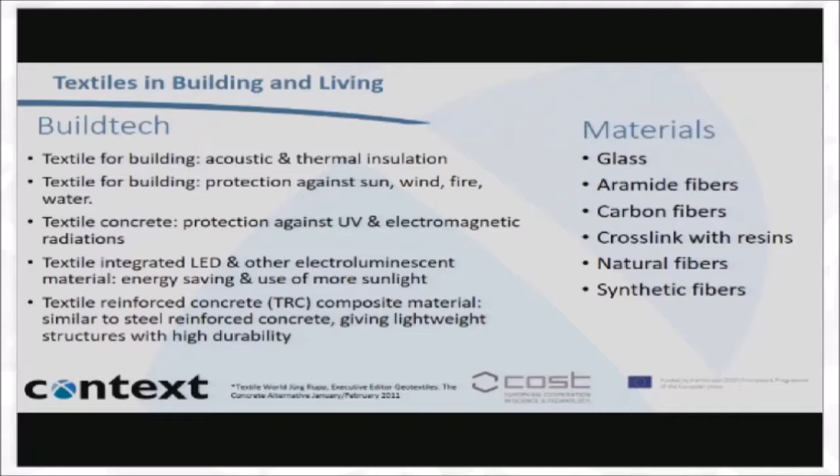Protection against atmospheric agents like sun, wind, fire, water, against UV rays, electromagnetic radiation. They are combined with electroluminescent and LED material for energy saving and energy production. And we also use textiles to reinforce concrete. So we have many applications in terms of composites. We have many different kinds of materials, of course. These are technical fibers: high tenacity fibers, glass, aramid fibers, carbon, cross-linked with resins, but also natural fibers.

As has been said before, they start to have a very important role in the improvement of buildings, and also synthetic fibers. Because if we think about the trends for the future, we can repeat what has been said before by my colleagues. Sustainability, for instance, is one of the key trends. This is why natural fibers and the recovery of waste are important in the building sector. Many applications nowadays are realized through the recovery of waste from the textile sector, because textile processes for apparel produce a big amount of waste.

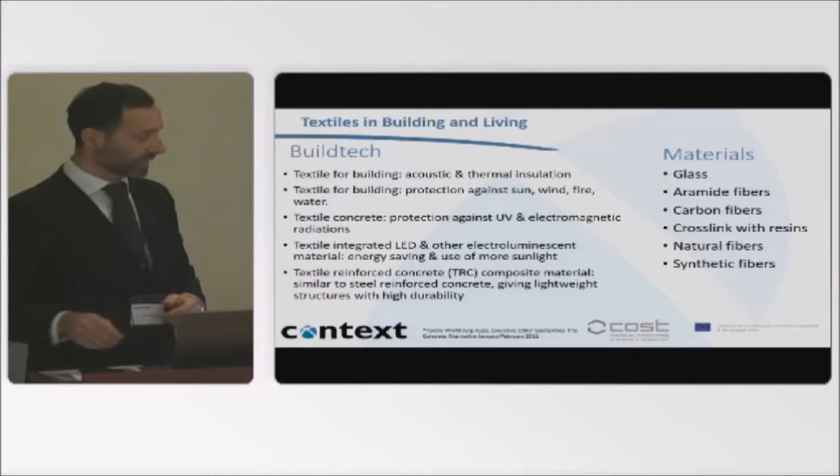We have seen carbon that is producing a big amount of waste during the processing. All this waste can be recovered and not disposed into the environment, and utilized for realizing composites or other materials that are used in the environment. And I think this afternoon you will have the chance to see some very interesting examples of how the recovery of this waste can be used in building and also in other sectors.

The state of the art. Now I'm going to go through very quickly what are the materials and the technologies that are applied today, to see how textiles can help to overcome some of the difficulties that normally used technologies and materials face in the building sector. So we have semi-rigid fiber-based insulators like rock wool.

Rock wool is a material that is very much used in buildings, and it's very good to some extent, of course, because of its tenacity and insulation power, but it also presents some issues like the health protection of people, because rock wool can produce microfibers, as you know, that can affect the respiratory apparatus of people living in this environment. Then we have polyurethane and expanded polystyrene.

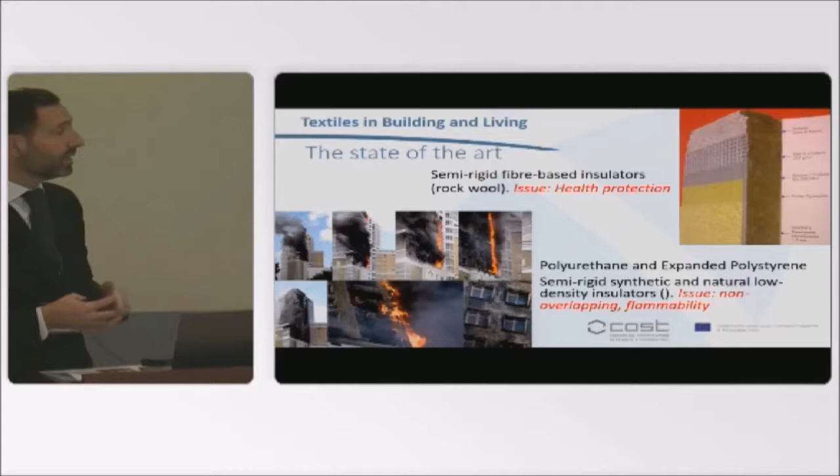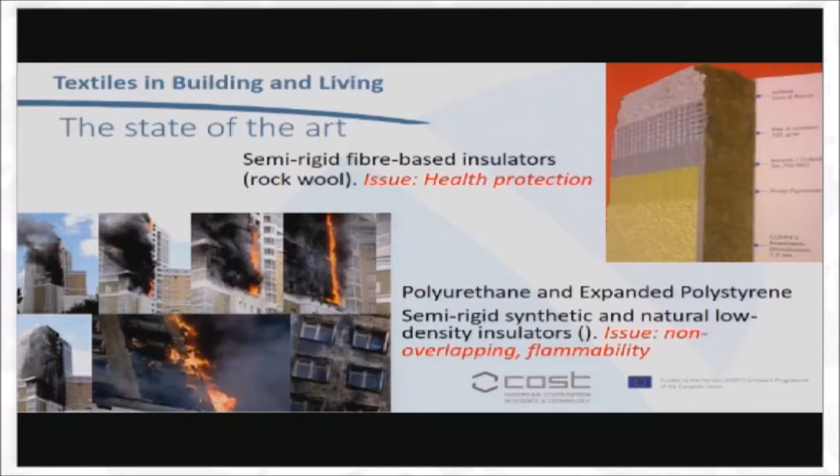Also, these semi-rigid synthetic and natural low-density insulators have a problem because they have high flammability. Besides being difficult to overlap with other materials, in case of fire, here you can see an example of different phases of a fire occurring in a building where the facades were covered with this material, in particular expanded polystyrene. They produce like a multiplier effect, and so the propagation of the fire is very fast, faster than what it should be.

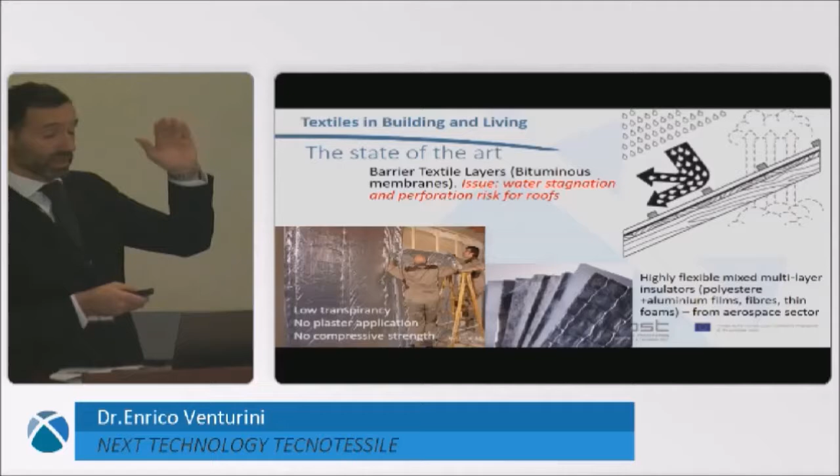Bituminous membranes, so we have here some layers of textile materials, and this application is very used in the case of roofs, but there is a risk of water stagnation, and this can cause microperforation of roof components.

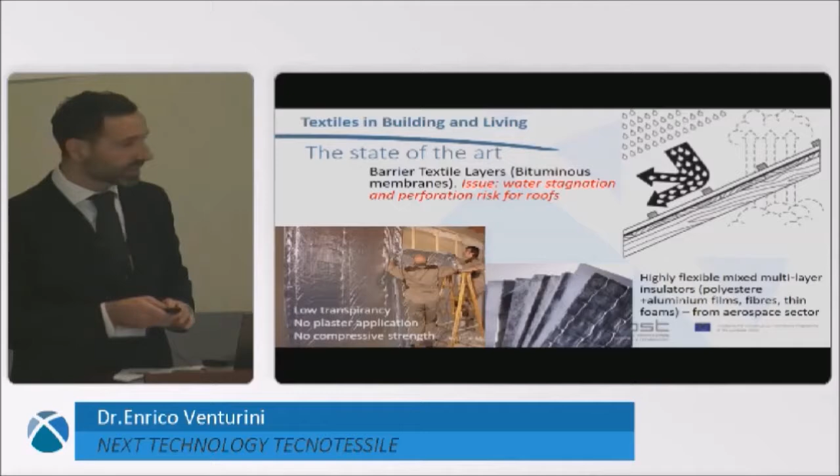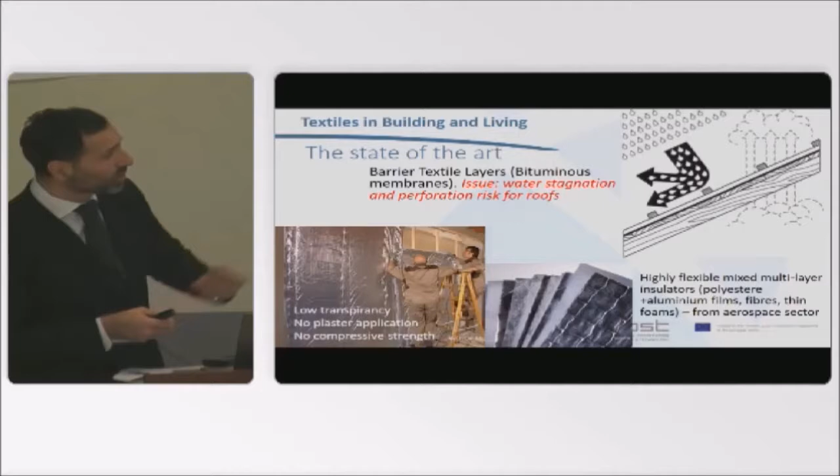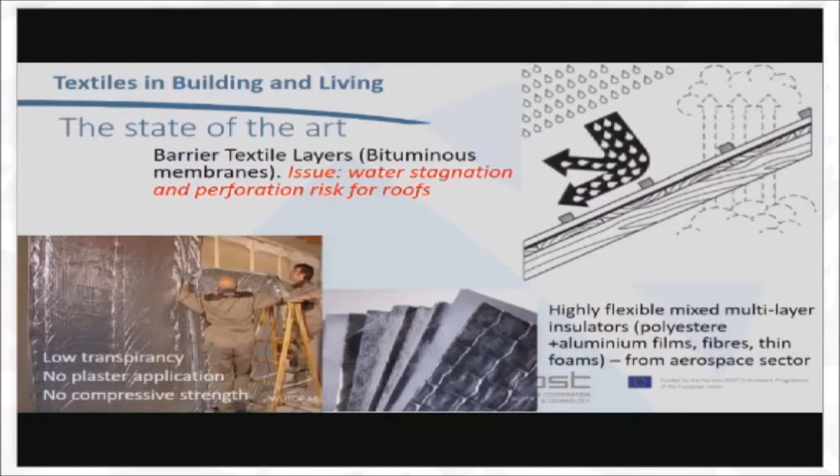The last example I'm going to show you is this multi-layer material which has been transferred from the aerospace sector, because it is used in the construction of some components of aircraft or also for space shuttles. And this is a multi-layer composed of films, fibers, and thin foams, including polyester and aluminum, as you can see here. So it is very light, it is very resistant, it has high tenacity, but it's not transpirant. It cannot be combined with plaster, and it has no compressive strength. So these are some of the issues that can be tackled through the application of textiles, okay?

Why new materials? Because new materials can provide, first of all, functionalities that traditional materials are not able to provide, so that customer needs can be met, and we can provide extreme customization and also novel applications. New properties are possible because the manipulation can go down to the atomic scale for diversified functions. So standard properties of our technical textiles are tenacity, durability, thermal and acoustic insulation, and of course also aesthetics in some cases, like in interiors.

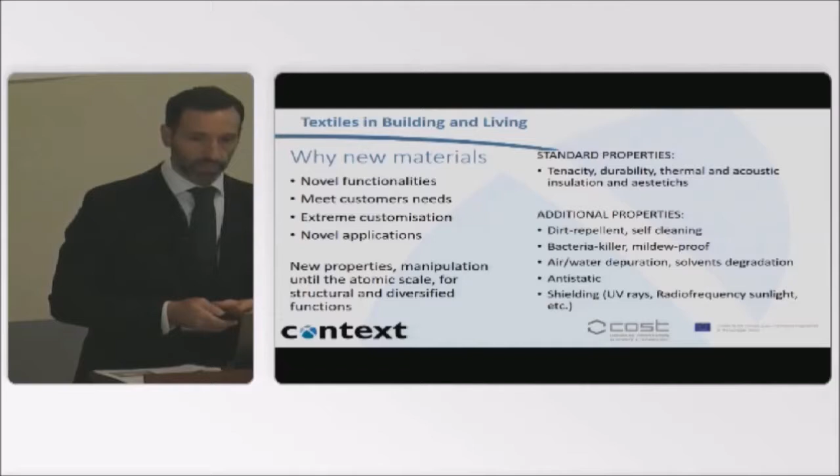What we can add through novel technologies and novel applications are functionalities like dirt repellency, self-cleaning, bacteria-killing properties, mildew proofing, air and water depuration, solvent degradation, anti-static, and many different kinds of shielding from UV rays, radio frequency, sunlight, etc. Okay, so these are some of the possibilities, and we're going to see some examples. Of course, what we're going to see is not exhaustive. There are many possible applications, and we discussed this also yesterday during the working group for textiles for building.

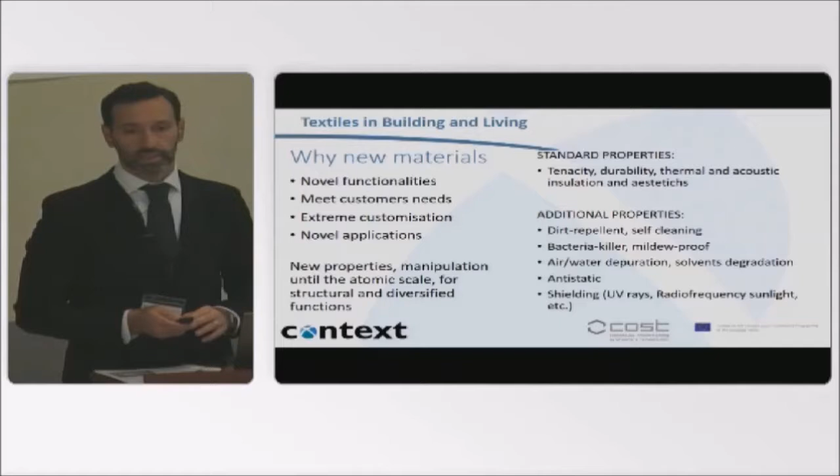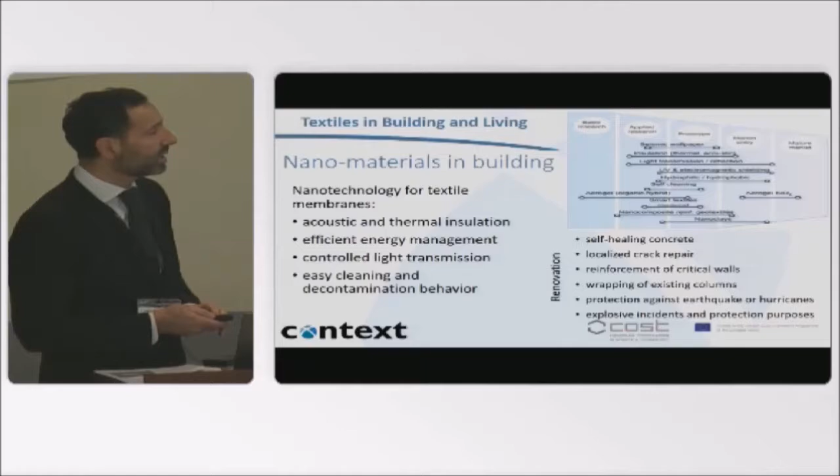Sustainability is one trend, but the application of smart textiles is another trend in terms of self-regulation of the components of the building, for instance, of the concrete. So there are many possibilities here, and these new materials can be mainly composed, this is quite consolidated now, by nanotechnology. Nanotechnology can provide membranes for acoustic and thermal insulation, energy management, so energy production and energy harvesting, control of light transmission, easy cleaning, and decontaminating behavior.

Here I have taken, from a study realized some years ago, this table where you can see the TRL, the technology readiness level, for different technologies that can be applied through nanomaterials and nanotechnologies in different building applications. And they can also be used in the renovation of buildings. So they can provide self-healing functions, crack repair, reinforcement of critical walls. Also the wrapping of existing columns is another very important topic, through membranes, protection against earthquakes or hurricanes, and incidents in terms of explosion and protection.

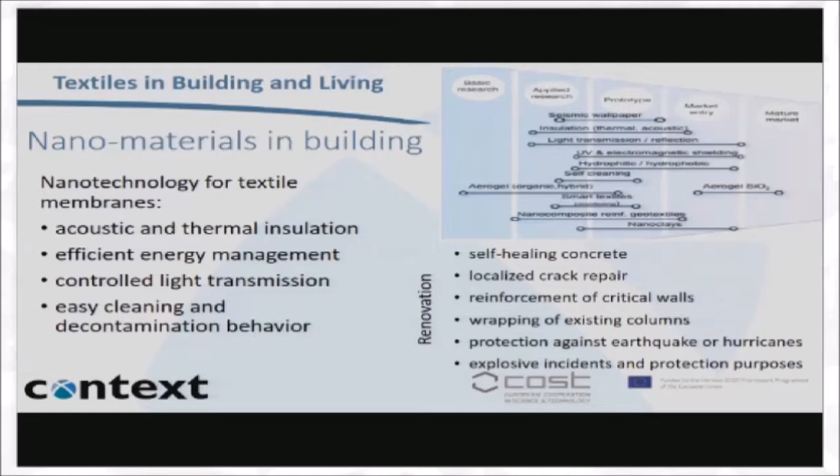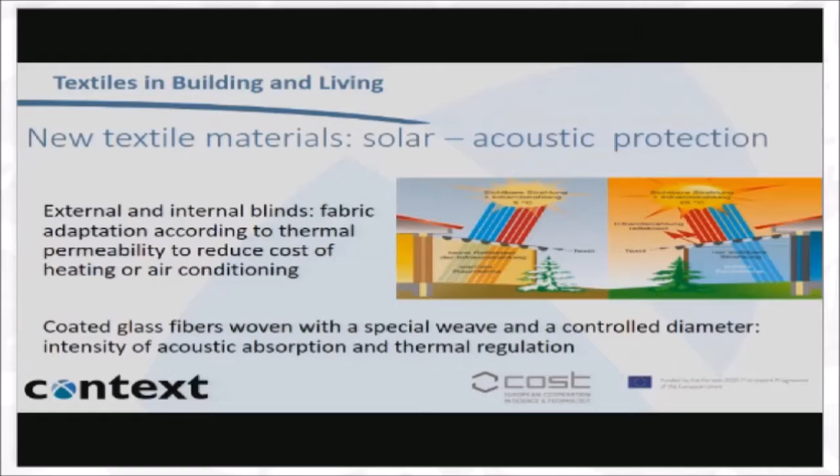Solar and acoustic protection. For instance, this is a project that has been carried out in Germany. So these are internal or external blinds for roofs. The fabric here is combined with the normal material used for the roof, for the cover of the house, and it can adapt in terms of thermal permeability. So this can help to reduce the cost of heating or air conditioning depending on the season, because the heat coming from outside can be filtered and adjusted.

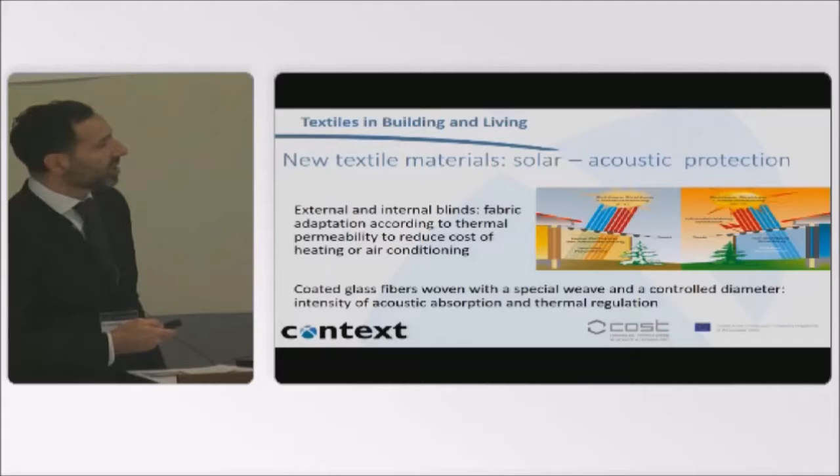So this is another example. I also have here some samples if you want to see. Yes, I know I'm already late, but I have many examples. This is fiberglass fabric that is used, it's produced by an Italian SME, and it's used for the acoustic and the thermal regulation of the interior environment of the building.

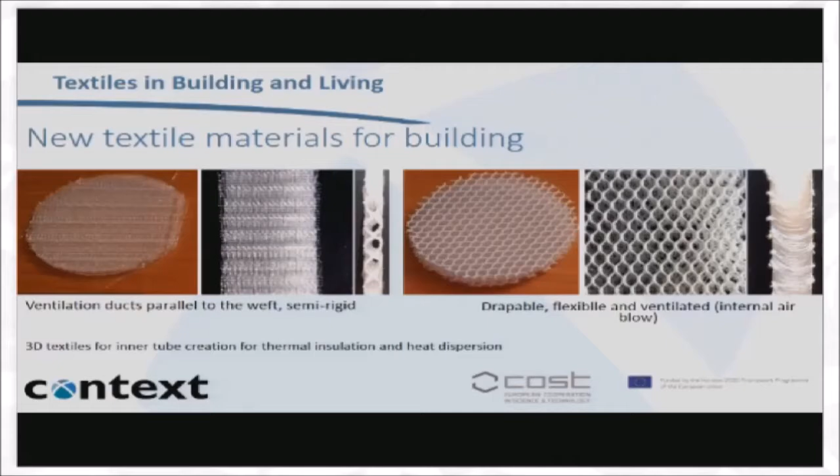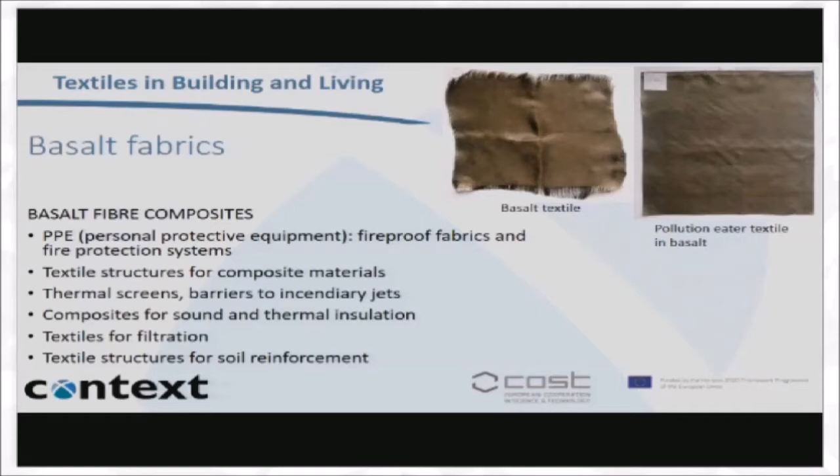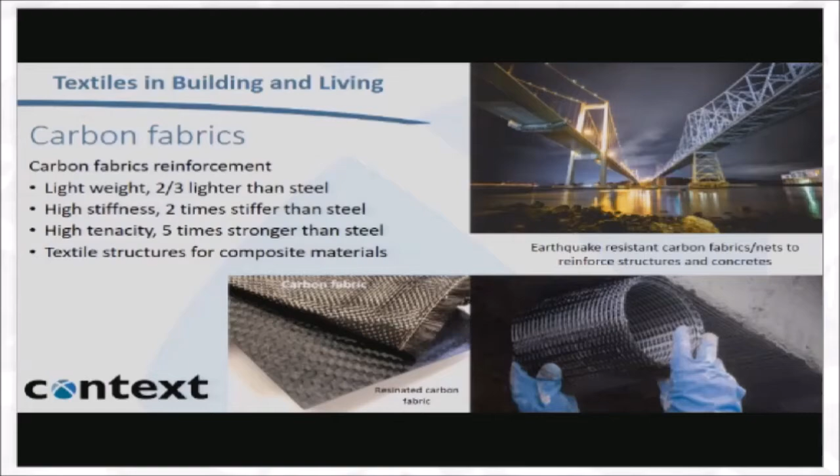The basalt fabrics, they can replace the rock wool because they don't have the same type of problem of the rock wool. And so we can create composite material with basalt to provide thermal screens or barriers to fire or filtration, etc. Carbon fabrics are also very much used in the building sector because of their lightness. They're 2/3 lighter than steel. They're stiff, so 2 times stiffer than steel and 5 times stronger than steel. So you see they are very widely applied at concrete, sorry, the word didn't come to my mind.

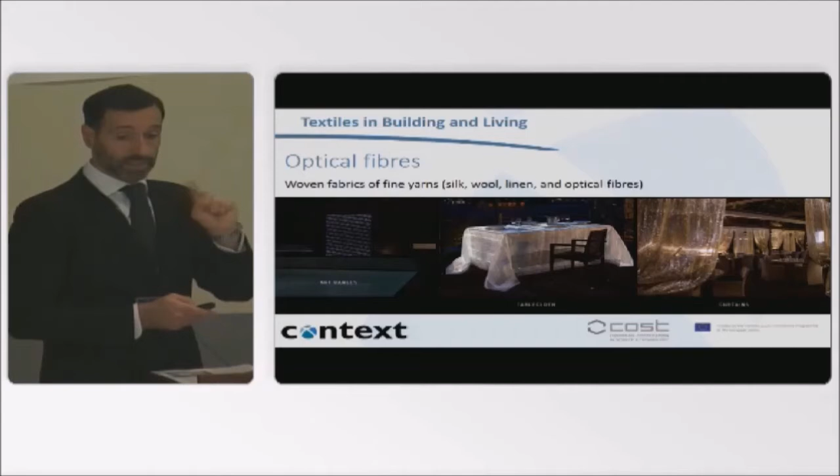Optical fibers applications are also very interesting in terms of future applications. Nowadays, there are some luxury products using optical fibers in combination with other very fine yarns like silk, wool and linen. And here you can see some examples, for instance, curtains or table covers. But there are also technical applications of optical fibers that could help a lot.

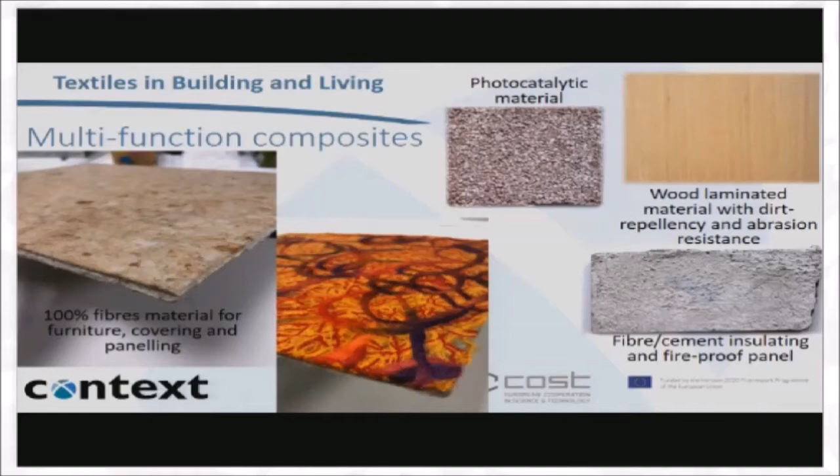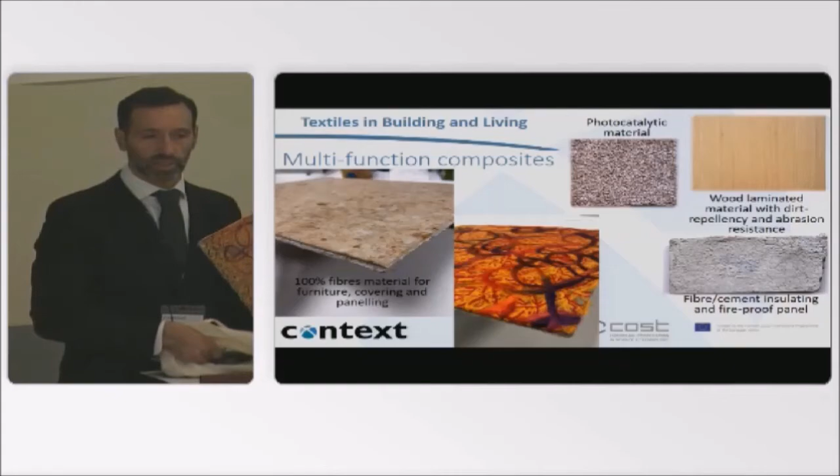And here, if you are interested, and I'm going to my conclusion, we have developed a few days ago, so they're still very, very primitive, some samples of a new material which is only composed of fibers. There are different kinds of fibers. There is no glue, no resin, no silicone, nothing. Through a thermal process, we can produce many different ideas, applications, and they can be used for interior components. You can combine different kinds of fibers.

For instance, now you cannot see from there, but this is done with the same process. It's only fibers, and these fibers are combined with waste coming from the food sector. If you would like to see from close distance later, you can come and talk to me, and you can have fun trying to guess what kind of food waste is included in this. So there are infinite possibilities for application of textile waste, as I said before, in the building sector.